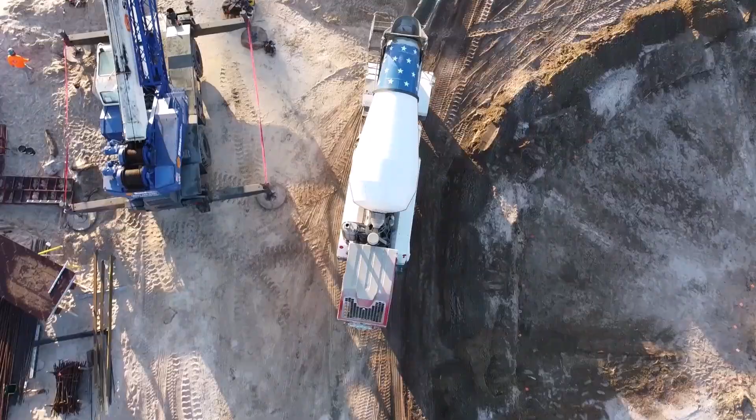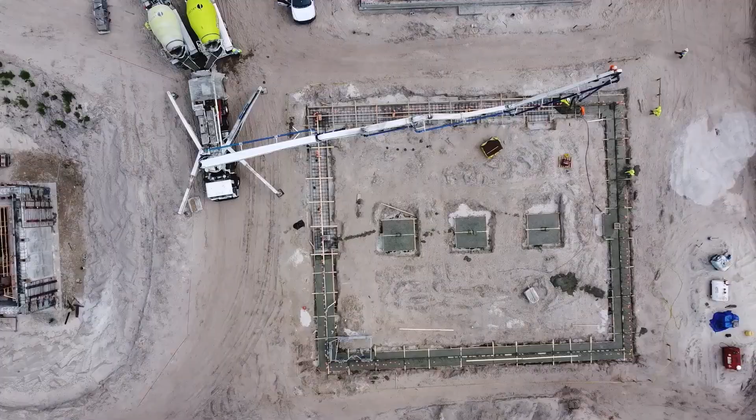Think of construction, one of the first things that come to mind is concrete. This widely used construction material is literally the backbone of the construction industry. But before we can become successful in the concrete scope of work, we have to understand the precautions we must take to ensure our safety and the safety of others during concrete operation.

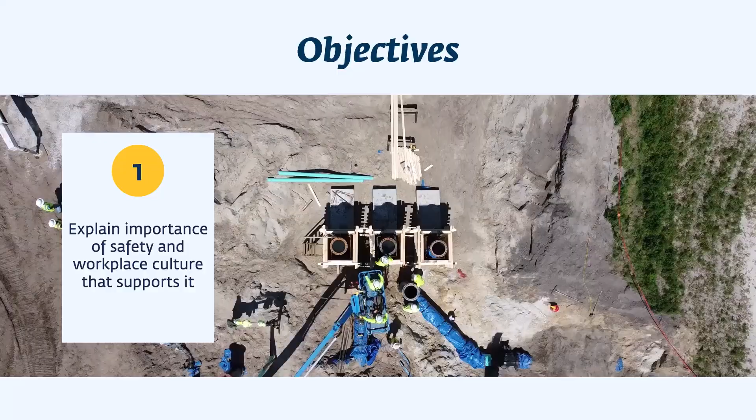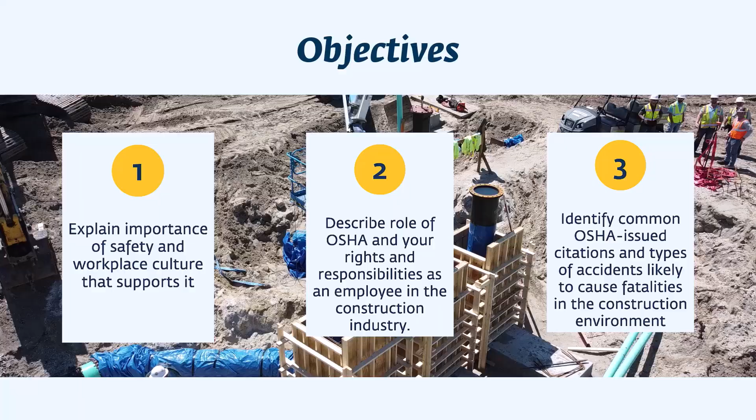Our objectives for today are: 1. We need to be able to understand the importance of a well-working safety culture in the workplace and how you can support it. 2. Describe the role of the Occupational Safety and Health Administration and what your responsibilities and rights are. Lastly, identify common types of hazards on site that can cause serious injury or worse, a fatality.

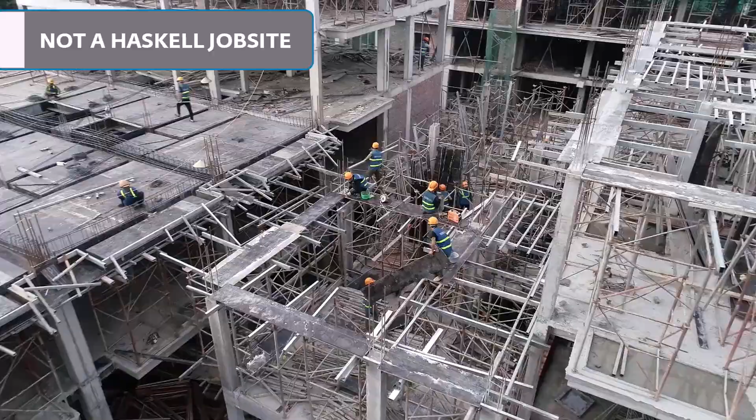So, what does a job site look like that does not have a working safety culture? Well, there are a couple of things that you can almost immediately point out when you observe the activity on site. One of the first things you will notice is a lot of at-risk behavior. Nobody's tied off, housekeeping is poor, or individuals jumping over spots that have no access. Another thing you will notice is the poor planning for the operation. No one seems to have what they need, and people generally look lost.

Then, the lack of training. Operators with no seatbelt on and craft walking down ladders without 3 points of contact. Basically, the job site has developed a culture that has failed to support their craft and give them the tools they need to recognize hazards to not only protect themselves, but others around them. And we all know that truly experienced craft workers understand the commitment to safety and that their hazard recognition abilities will be tested every day out on the job.

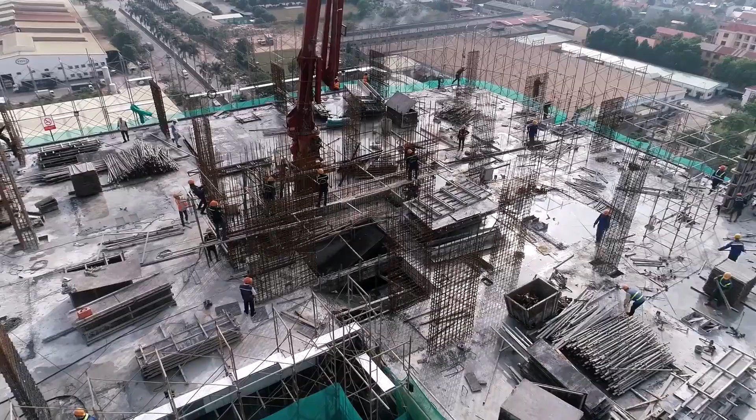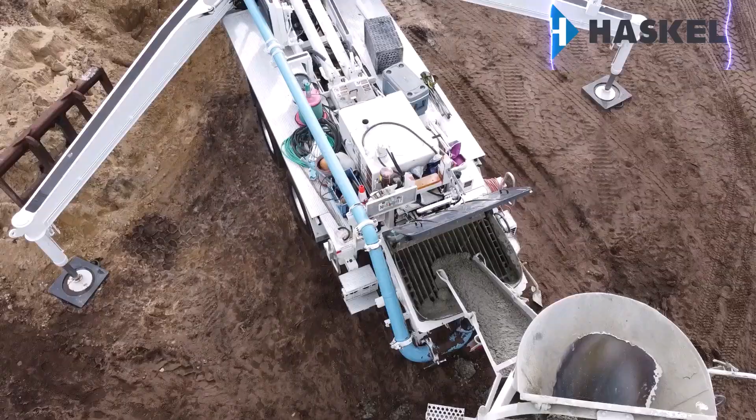If you are still confused on the importance of safety, then let me spell it out for you. We don't want anyone to get hurt or die in the process of construction. We spend more time with each other than we do with our own families, and we should all make sure we get back to them with all our fingers and toes. That's why we are committed to keeping you and everyone around you safe. But here's the thing, we cannot do it without your help. We need everyone working responsibly and safely to ensure our main goal to provide a healthy and safe working environment.

We encourage you to help our inexperienced craft with hazard recognition because we all know they are at the most risk, and they are in many cases the source of the accidents and near misses on site, even though they are not always the one getting injured. So when you get a chance, mentor our inexperienced craft in hazard recognition, and who knows, the life you save may be your own.

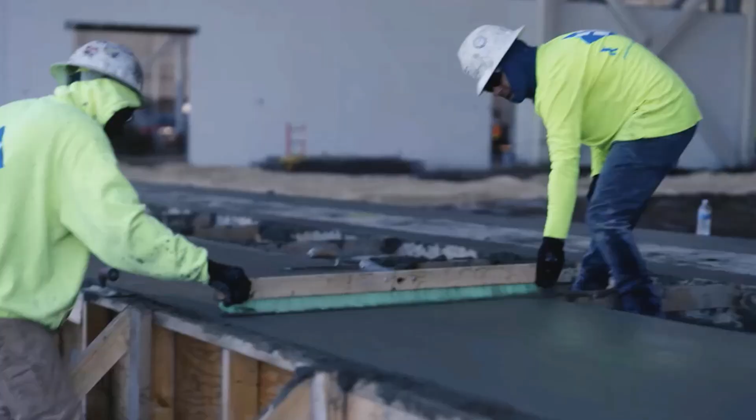At this point, you may be asking yourself what makes an effective safety culture. Well, let me tell you. First, we need to have or maintain a sound safety policy, which we do have. This policy needs to be understood and incorporated out in the field with a good attitude. Second, this policy should be communicated throughout our leadership, both in the field and in the office. We must leverage our strong leadership skills out in the field to involve and encourage the commitment of our policies by our craft, subcontractors, and field personnel.

Remember, if the policy is not understood, agreed upon, or not effectively communicated, the policy will not translate out in the field where it is needed the most. And finally, we need to actively train our personnel with positive reinforcement, the necessary safety skills needed for each type of operation, as well as how to adapt to the changing conditions of our projects day to day.

Let's take a closer look at the role of the Occupational Safety and Health Administration. It is their mission to enforce that companies provide a safe and healthy environment. To do this, they have created several parts of the Code of Federal Regulations. In construction, we focus on parts 1926 and 1910.

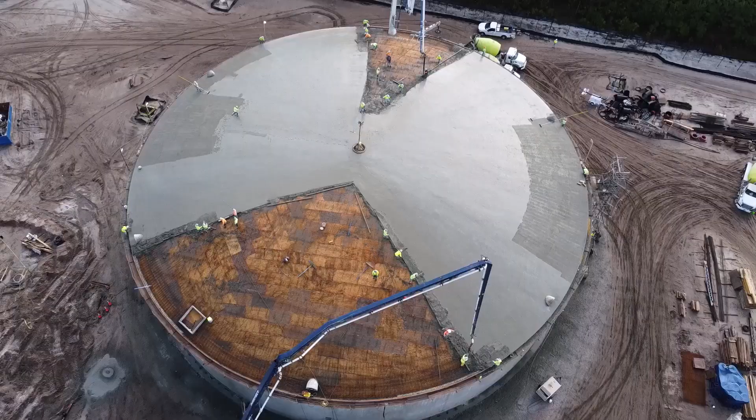1926, concentrating on construction, and 1910, containing the general industry standards. With these standards, we have all the information we need to ensure we can create site-specific safety plans and job hazard analysis forms to promote our safety culture. But what are you and your employer's responsibilities?

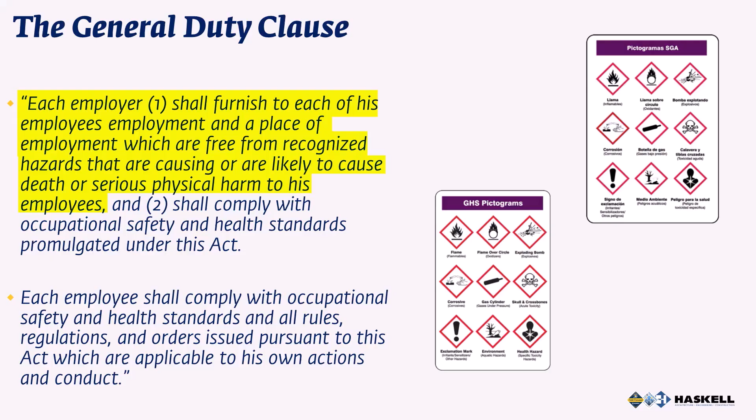Well, under the General Duty Clause, each employer shall furnish to all employees a place that is free of hazards that can cause death or serious injury. They also must provide training and personal protective equipment for operations that have these types of hazards.

What about your responsibilities? You have to follow the safety rules, wear personal protective equipment, and participate in the training provided by the employer. I also like to mention that you have the right to address any issues with your supervisor and report any issues if not corrected.

You are also protected by Section 11(c) of the OSH Act from any discrimination or discipline if you do decide to report any issues. For more information, I encourage you to reach out and get your 10-hour safety course where you can learn more about this subject.

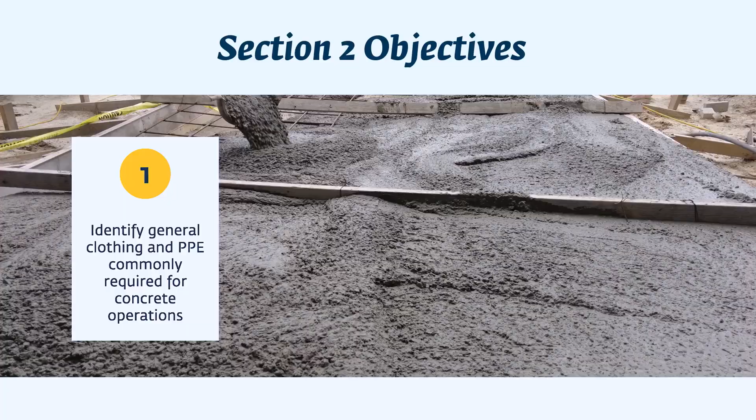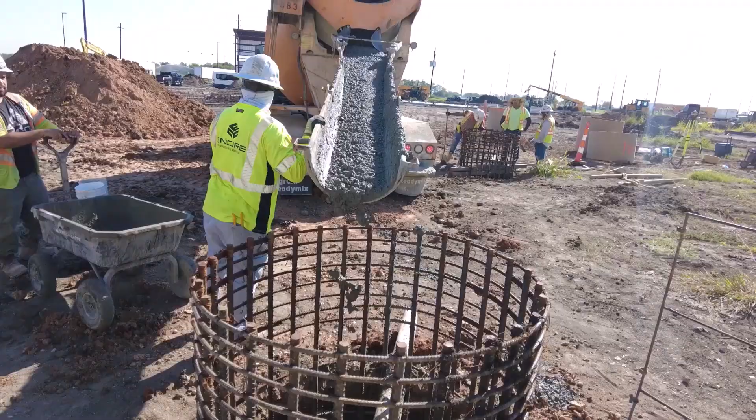There are several ways that concrete can be a hazard: one is skin contact, two inhalation, and three the handling and forming of the concrete. Let's first focus on skin contact. For many people, concrete can have adverse effects to their skin and health when they come in contact with it. Cement is alkaline or has a high pH level.

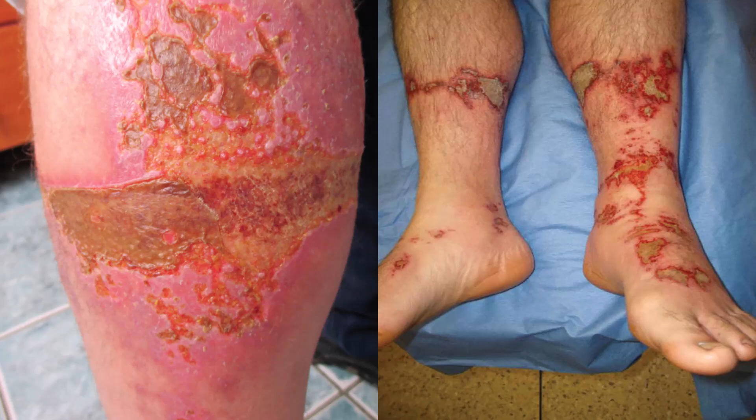Cement is highly caustic or corrosive. Once you mix dry cement with water, it has a pH of 10 to 12 on a scale of 14. That level of pH is high enough to cause chemical burns on unbroken skin with extended contact. If that's not enough, Portland cement also contains the metal hexavalent chromium.

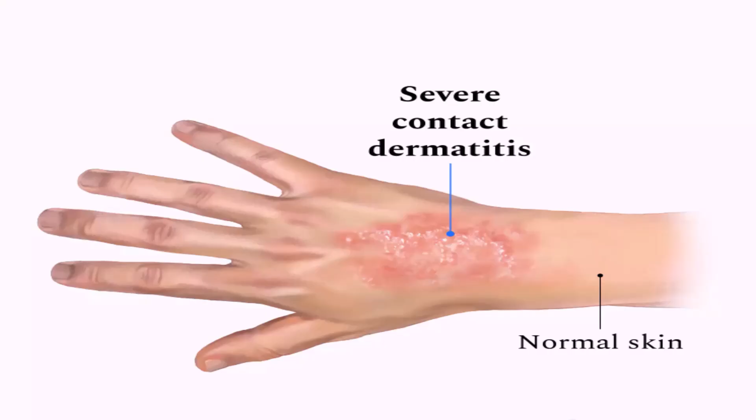It's the toxic chromium that sensitizes your skin and causes contact dermatitis. Hexavalent chromium has been classified as a carcinogen, or causes cancer. Certain epoxies, accelerators, water reducers, superplasticizers, retardants, and other admixtures in concrete can also have a sensitizing effect.

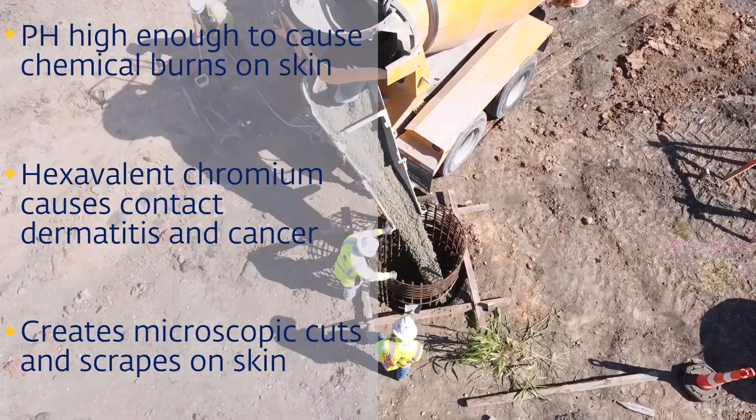Concrete is also highly abrasive, creating microscopic cuts and scrapes on your skin. This allows the alkaline, toxic substance to contact deeper tissues and worsen the injury. That is why we must use the right personal protective equipment such as gloves, long-sleeve shirts, safety glasses, face shields, and waterproof boots to prevent the concrete contacting our skin and causing injury.

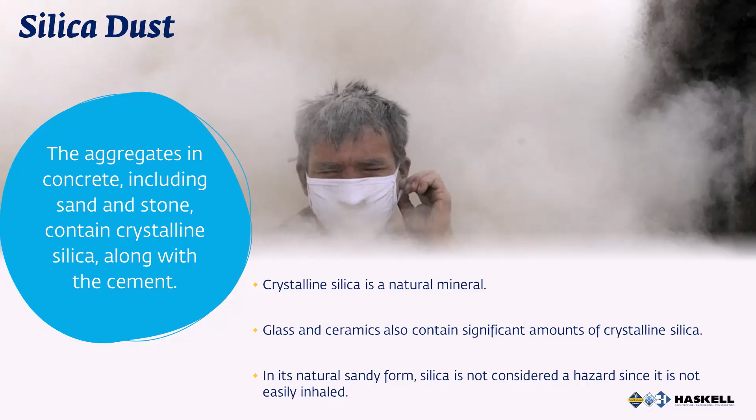And if we come in contact, we have to wash off the concrete with plenty of clean water and contact your supervisor immediately. Skin exposure is only one of the hazards, and most fail to recognize that the dust created when working with concrete can also have consequences. Whether we are cutting control joints, grinding surfaces, sweeping the floors, demolishing sections, or drilling holes for epoxy anchors, those types of activities cause plumes of silica dust.

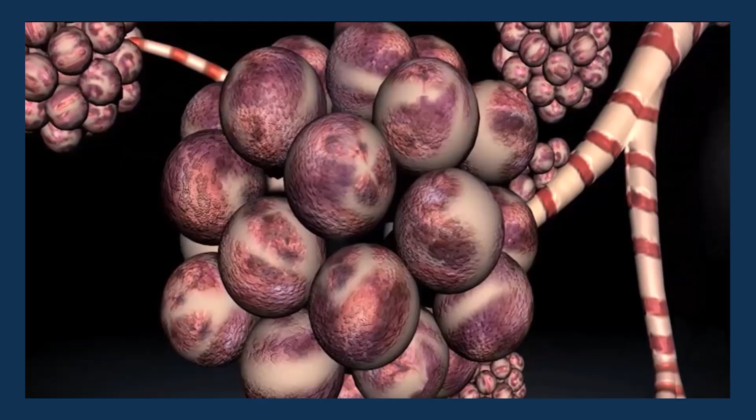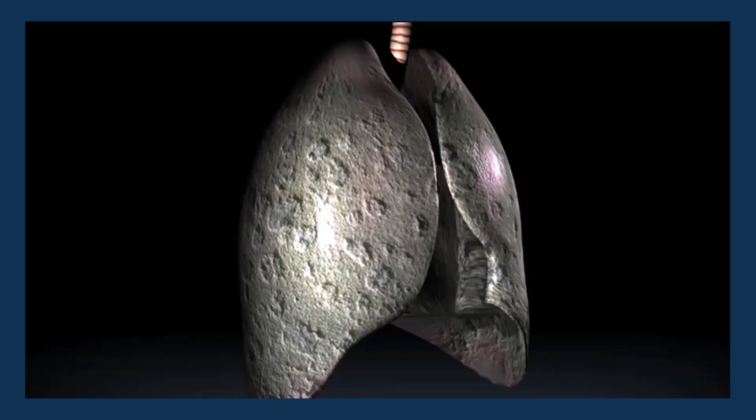When this dust is inhaled, silica dust particles, which are 100 times smaller than a grain of sand, enter the lungs and can cause severe and sometimes fatal diseases. This risk is exponentially increased by long-term exposure. Just think about this material collecting in your lungs and solidifying slowly, leaving those parts of your lung unable to absorb oxygen. The majority of these diseases are irreversible and many can be fatal.

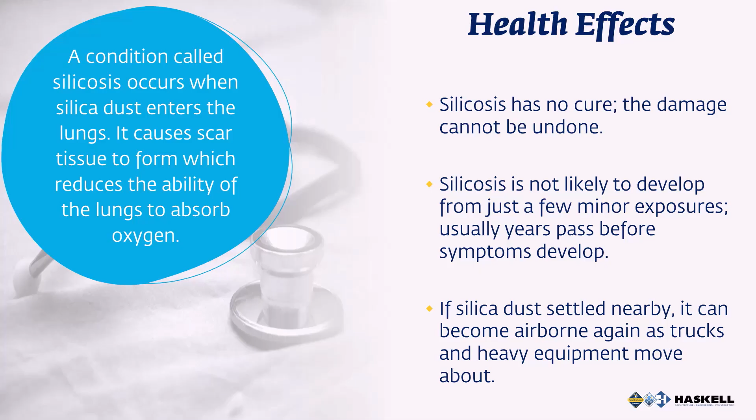Crystalline silica is a known carcinogen and can put workers at a highly elevated risk for lung cancer, chronic obstructive pulmonary disease, and kidney failure. Exposure to respirable crystalline silica has also been linked to the development of autoimmune disorders and cardiovascular impairment.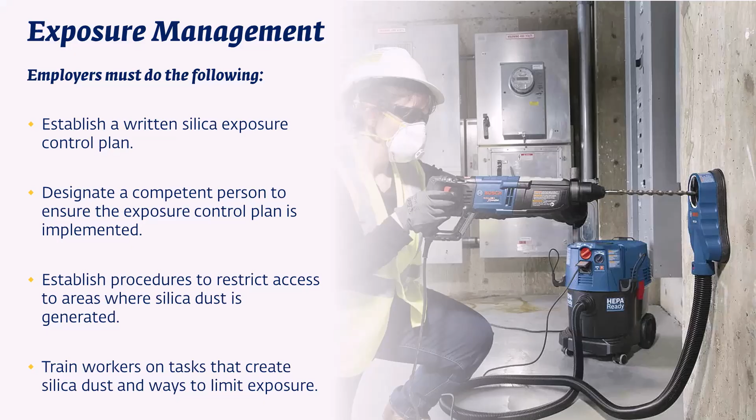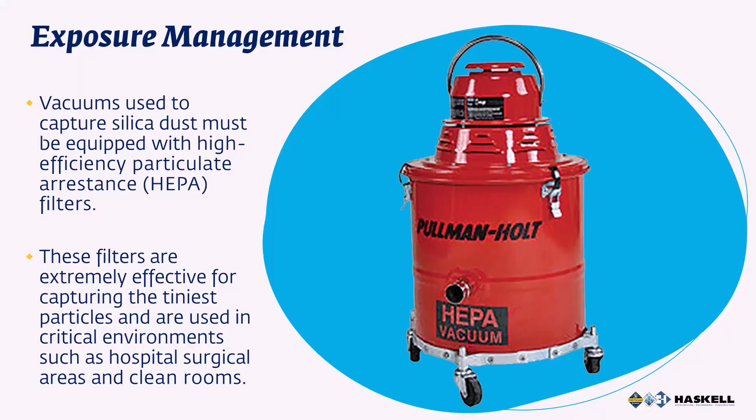We must protect ourselves and those around us when we are cutting, drilling, or grinding concrete by using exposure management. Exposure management is a plan to use water, marking off areas of exposure, vacuums for dust collection, and having the right personal protective equipment, like a mask, to protect ourselves and others in the area.

Now that we understand the hazards of skin exposure and inhalation, we can focus on the handling and forming hazards of concrete. Each concrete operation should be carefully planned and communicated before any activities start. Concrete is delivered to the site in two ways: by truck or by hand.

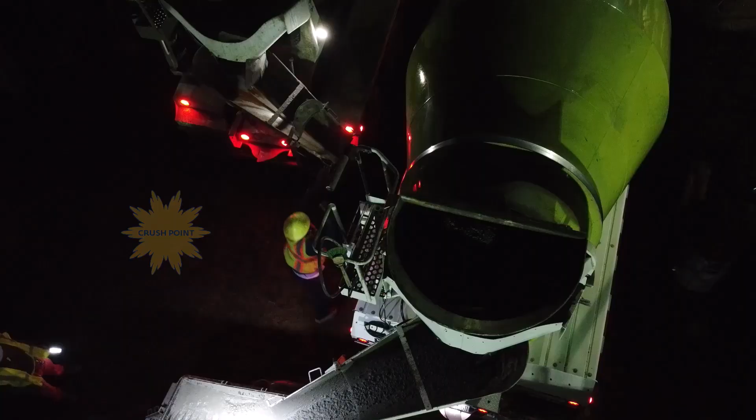If we are getting the concrete by truck, we can expect a fully loaded truck mixer that typically weighs approximately 30 tons to show up. Most of the time, these trucks will have to be backed into position and will need a spotter. Poor ground conditions can lead to delays or rollovers.

Also expect caught-between hazards and equipment crush points when backing up the mixer to either the pump truck or close to the placement area. When chuting the concrete, it can splatter drops around the hopper or forms, which could come in contact with your skin.

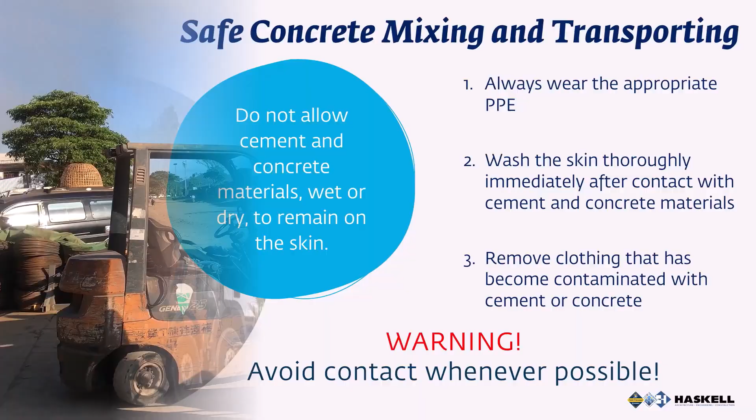Having eye protection and other PPE to cover your skin is a must. Mixing on site can be hazardous as well. Transporting 60 to 80-pound bags of concrete, if lifted improperly, can cause back strain. Opening the bags releases silica dust into the air. Mixing the concrete in the buckets releases dust and splatters droplets that can come in contact with your skin.

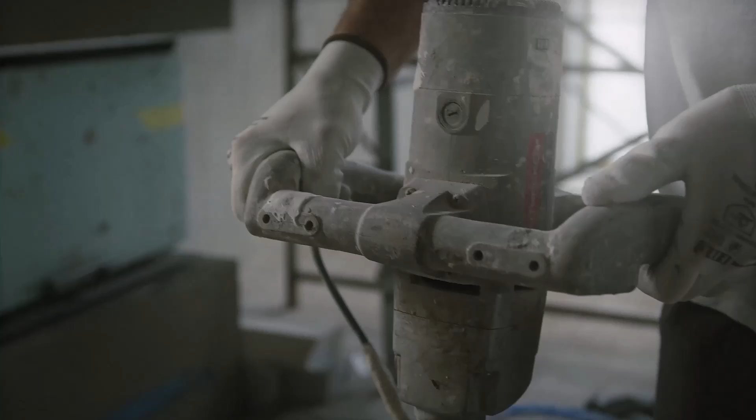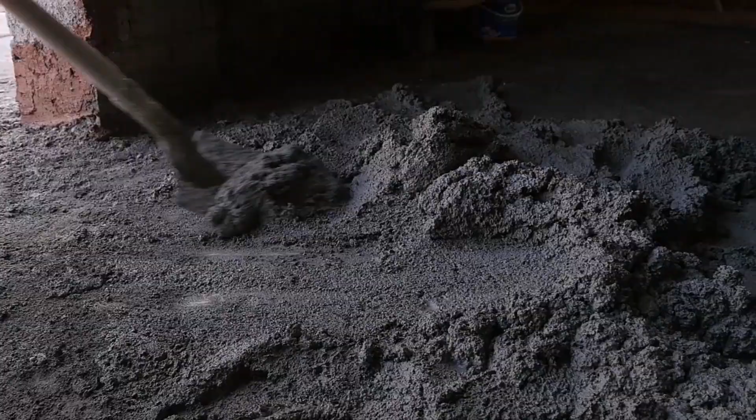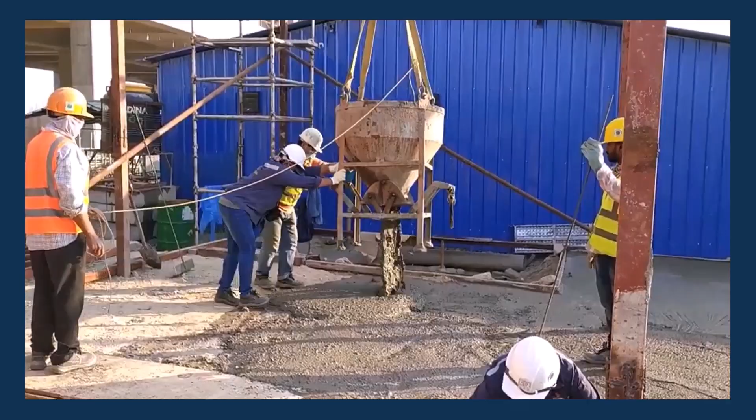Improper use of the hand mixer can twist your wrists and cause spraining. Then bringing those loads to the area by hand can lead to other types of awkward movements that can cause further sprains or falls. Most of the time, transporting concrete by hand is cumbersome and requires an amount of energy from the crew that can be exhausting. So, we like to use equipment to transport our loads of concrete to the placement areas. There are 3 basic types of equipment we will use to do so.

For short, level runs, we can use the wheelbarrow. A useful tool, but can also be a hazard if it is overloaded or the access to the placement area is not cleared and prepped for it. Concrete buckets are great, but the risk factor is increased. We will need to understand load charts and have a pick plan in place to use the crane. With a crane comes the requirement of certified riggers, spotters, and a certified crane operator.

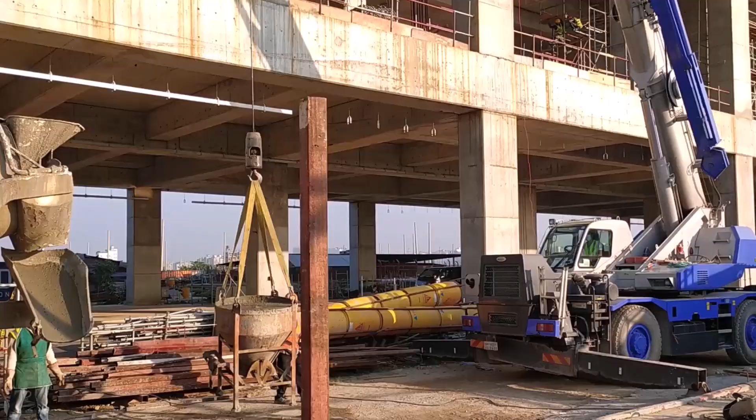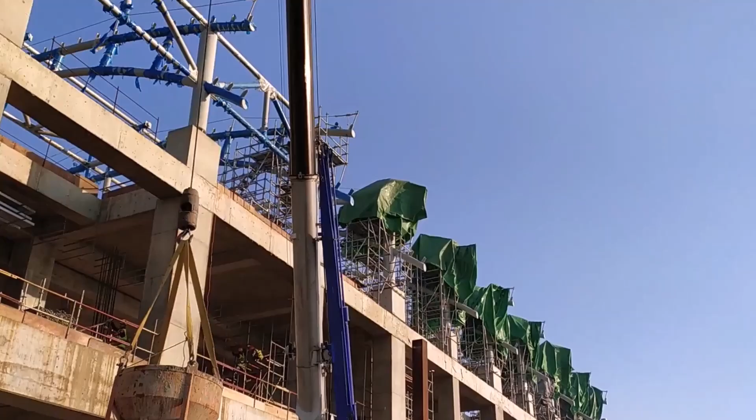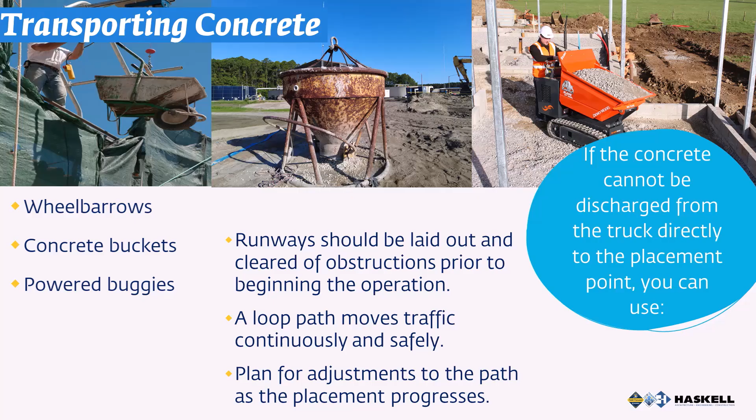Having a 4,500-pound bucket full of liquid concrete flying over the site is risky business and must be treated in a professional manner. If even a small amount of concrete falls from the bucket, it can be deadly. Lastly, we have the concrete power buggy or Georgia buggy. Another great way to transport large amounts of concrete, but also is heavy when loaded. Needs a spotter, pre-planned access routes, and can injure the operator or other workers in the area if not operated properly. All these types of equipment are great for transporting concrete, but all these types of operations still need to be planned and communicated to the entire team.

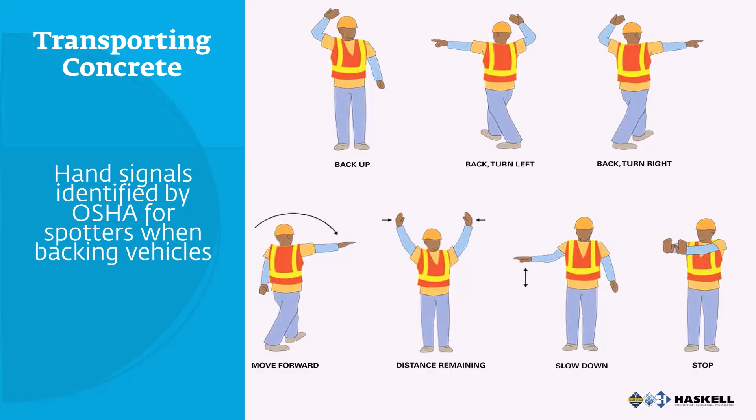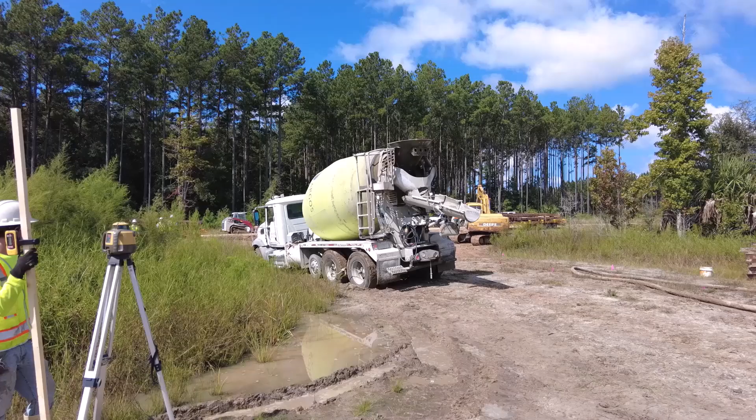When communicating the plan with your team, here are some hand signals identified by the Occupational Safety and Health Administration for spotters when backing up equipment. Before each operation, make sure both the operator and the spotter understand these signals. A properly developed plan will include these signals and will review them, so we are using clear communication out in the field. There have been many documented incidents where the operator and spotter failed to communicate the hand signals properly, which led to injury. Don't let that situation happen on your site.

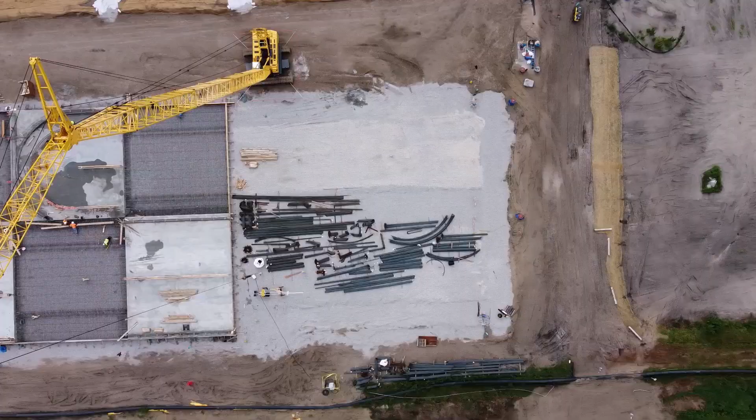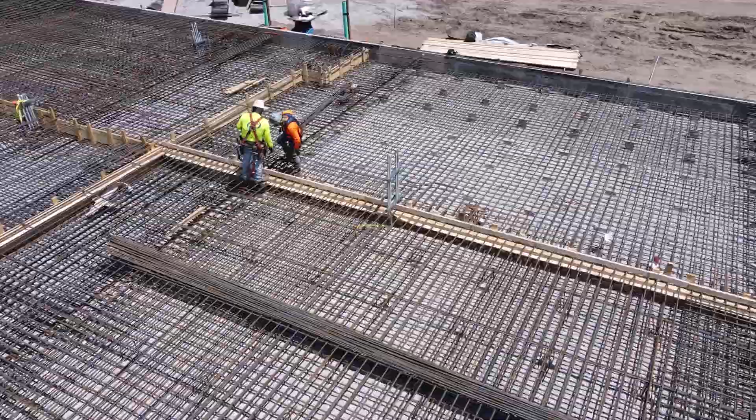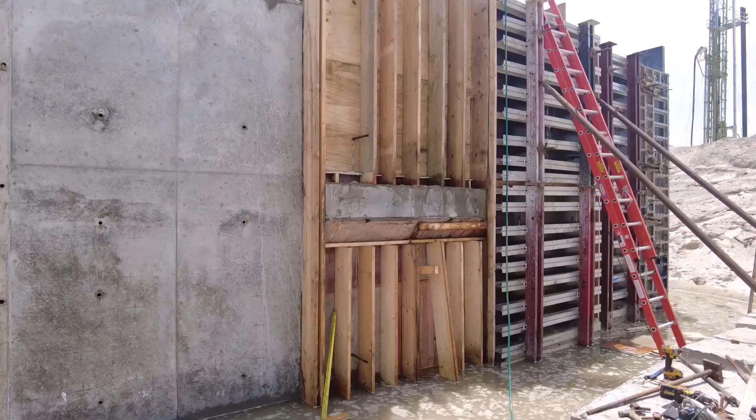We also have to consider formwork to be a part of our concrete safety discussion. Not only is the formwork difficult to construct, but there are plenty of hazards during this operation. During horizontal formwork, it is easy to have slips, trips, and falls over the edge forms or while on the welded wire mesh. Dowels can be protruding from the rebar mats to tie into the soon-to-be cast-in-place walls or masonry. Make sure that all exposed rebar is capped to prevent injury and always keep your eyes on your path. Access is key and must be planned out. Remember to never run or engage in horseplay.

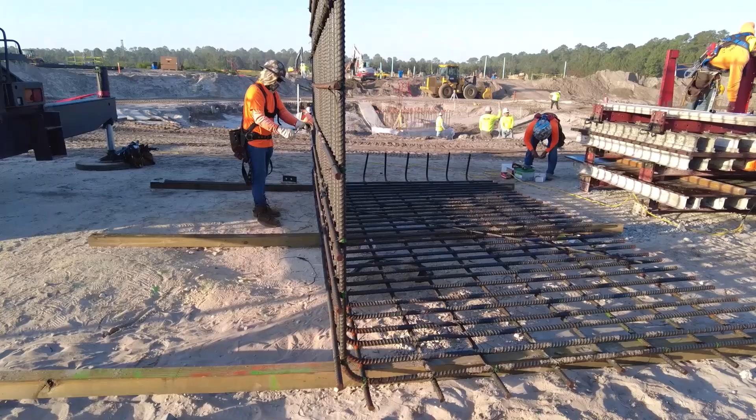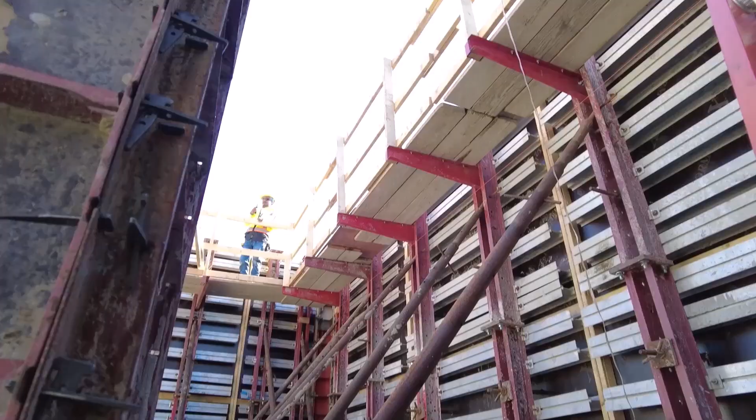Climbing up vertical formwork is forbidden unless you have been part of the planning for this operation and the proper provisions for fall protection are in place. Falling down on exposed rebar and mats in these types of areas is not a joke and a sure way to have a hospital visit. Just keep in mind that most of the formwork constructed is not designed to climb on or act as a walkway, unless we are installing a reusable form system designed to support attachments such as add-on walkways, anchor points, or ladders. Make sure you ask the competent person before climbing or walking on the formwork to be sure it can support your weight.

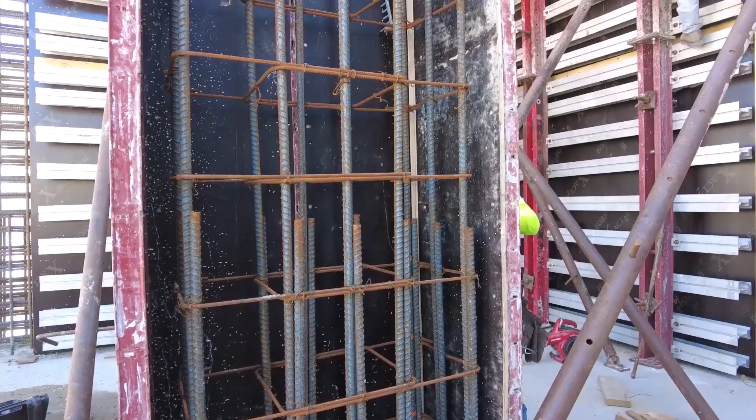Forms are designed to hold imposed loads from a specific direction, usually the head pressure that the concrete is creating from the inside of the formwork. When climbing above 6 feet, we will need to utilize some form of fall protection like a harness, lanyard, and suitable anchor point in place before walking or climbing on the forms. Every operation needs a hazard analysis during a team huddle before we start.